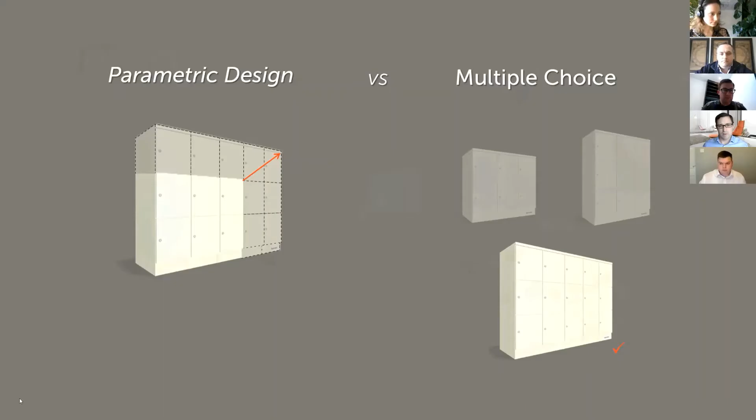While the screen is transferring to Bastian, I'll briefly cover what the demo includes. First, we'll look at how to find the customizer on the website, and then how to get started with a customized design. We'll take you through how to change the size and finish accessories of any chosen product, and then how to generate resources like a JPEG snapshot or a PDF summary, and even a complete customized CAD block to insert into your project.

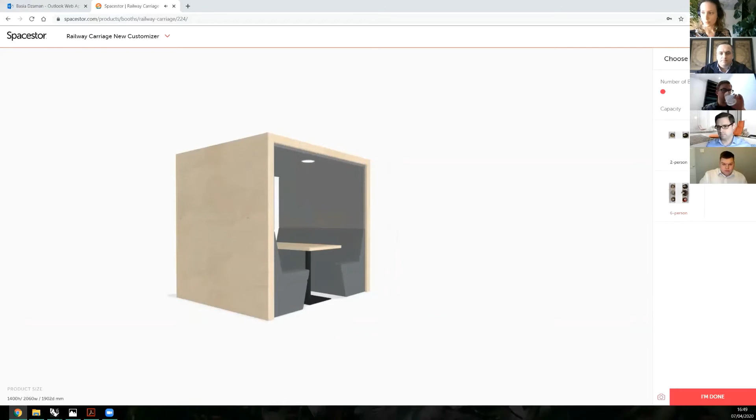So how many people can fit in the booth. Let's pick 4. You can pick how many booths in a run you'd like to have, and each booth can be adjusted individually.

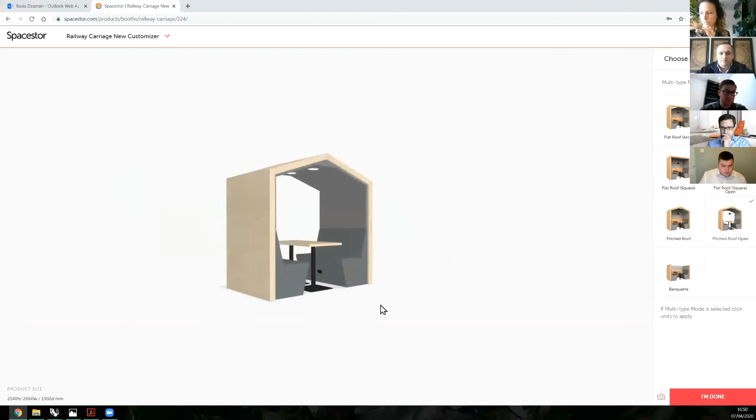Let's pick 1. Under choose configuration, you can pick the type of roof that the booth has. Let's pick a pitched roof without back. Every time you want to look around the model, simply drag in the scene or zoom in or out.

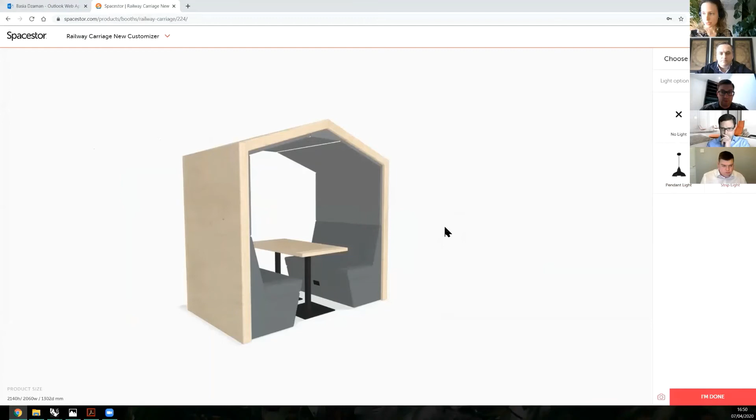Under choose accessories, the railway carriage has all of the light options, so for example a pendant light, strip light, and spotlight. Whatever I pick in the menu is automatically shown in the scene.

Then in the choose materials tab, you can pick all of the cladding materials in all the Spacestor ranges for cladding or upholstery. Here we can choose a different range of upholstery, and by picking the color, it's going to change the color of the booth.

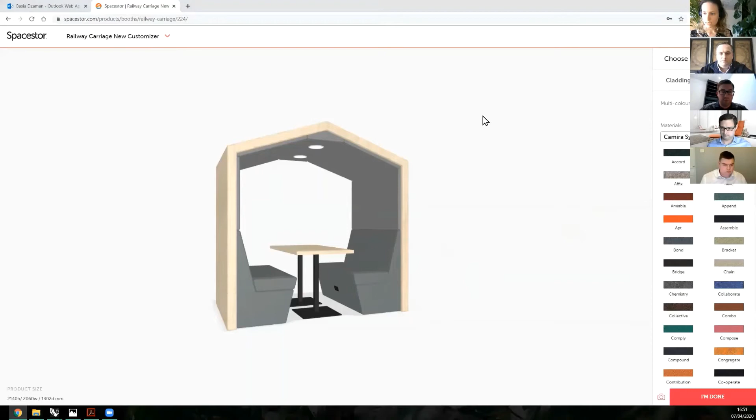The last step, when you're happy with the design, you can either take a screenshot by clicking this button with the camera here, and it's going to download the screenshot straight away. Or you can go to the I'm Done menu in order to choose what you'd like to do next.

Here we can ask for a quote. Clicking Quote Me adds the design to the quote basket. You can add multiple designs to the quote basket and request a price. Our team will surely get back to you with the price.

You can also request a package with a specification and screenshots and all the CAD that is generated specifically for the design you've just created. You can also save the design for later.

In order to do that, simply sign into the My Spacestor account. It's a free online account on our website where you can keep all of your projects. I'm just going to put my credentials in, and here you can pick all of the projects. You can also add new projects if there aren't any.

And I'm going to name this design and save it.

On the left, there is a summary of what's in the scene, so you can always proofread it and see if everything makes sense.

If you want to see all of the saved projects, you need to go to the My Spacestor account, and in this portal, go to My Projects. Here you can see all of the saved projects and arrange them into sections. You can change the names of the sections and drag and drop all of the products around. I arranged them into current projects, inspirations, and past projects.

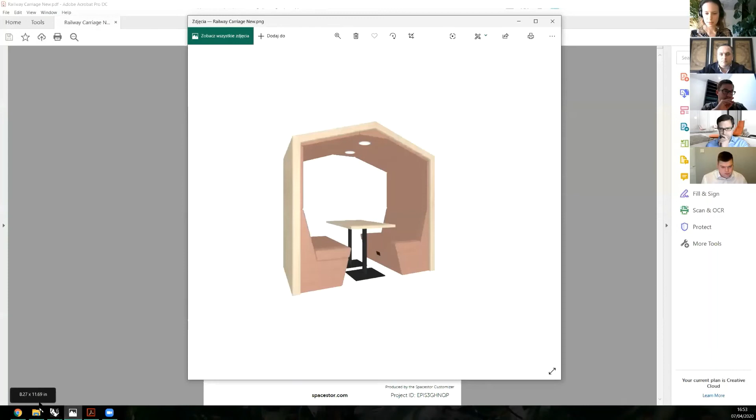Now let's go to my email and see if the design has been generated. And here under the download, we have a package that we just received from the customizer. In the package, there is a PDF with the specifications, a screenshot, and all the CAD blocks. Different designers and architects are using different programs, so the package contains all the most popular file formats. The only one we still have to generate manually is Revit, but we're currently working on automating it to be part of the package as well.

Let me show you how this looks in practice. I'll open up the Rhino file to copy the blocks. Here's the design we've just created. I'm just going to copy this, group and copy.

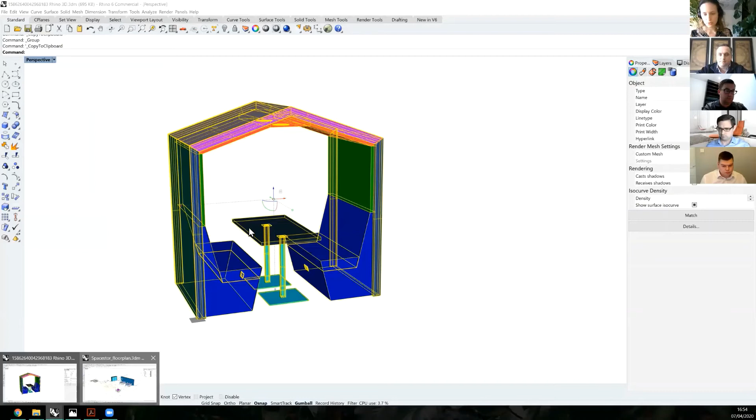And here I have a plan of our New York showroom open, and I'm going to simply paste it into the scene. Here it is. Now we have to position it correctly. I'm going to do it in the top view right now. So here it is, and I'm just going to paste it in here.

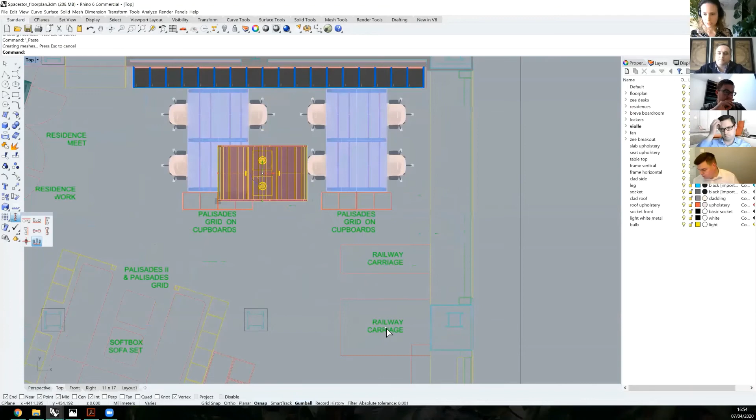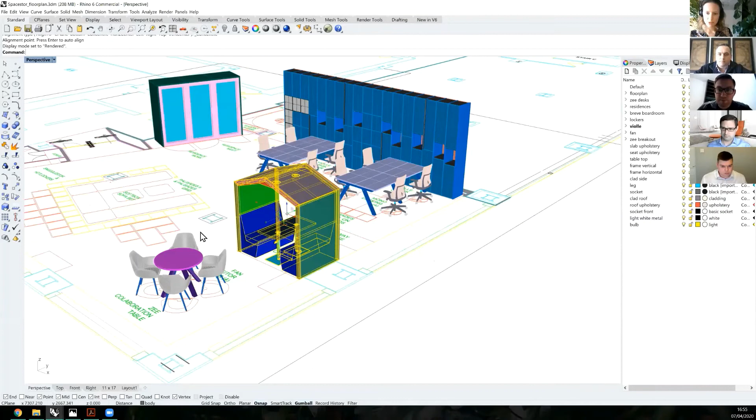So here is a space for the rail carriage. Let's see how this looks in the perspective view. Here it is, and now I can change the view to make it look nice. So all of the blocks are in the correct layers that can have a different material added.

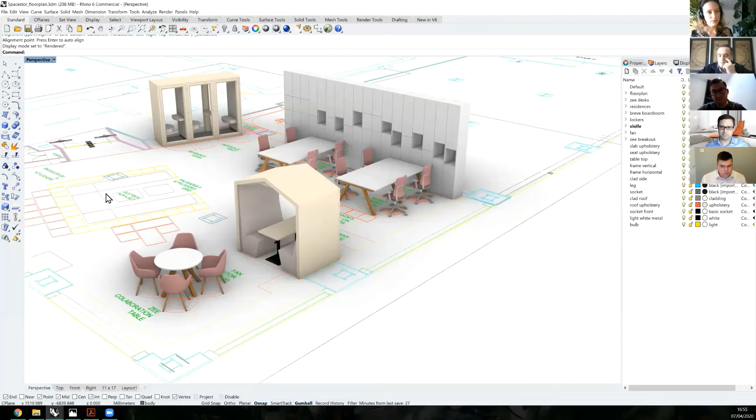And you can do the same for 3ds Max, SketchUp, AutoCAD. There are also 2D drawings for AutoCAD, you only need to put in a plan. And as I mentioned before, we have a lot of different products that can be customized.

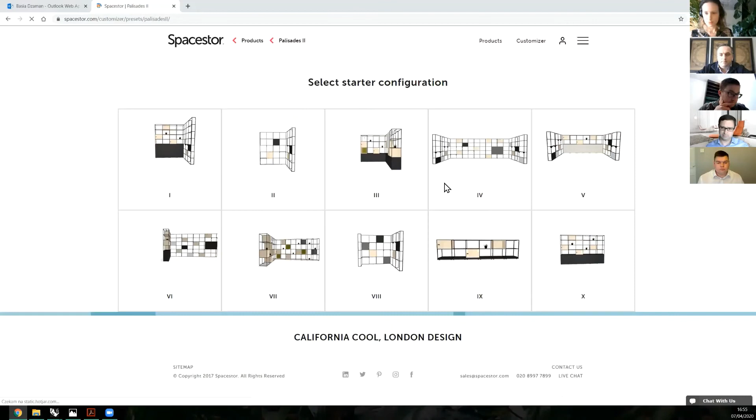Now I'm going to give you a quick example of one of the other products. Let's go to the Customizer tab, and here, let's say Palisades 2. Here are different presets for Palisades 2. Let's pick one. Every customizer is a little bit different because each product has different features that can be customized. So Palisades 2 has a different shape. Let's wait until it loads.

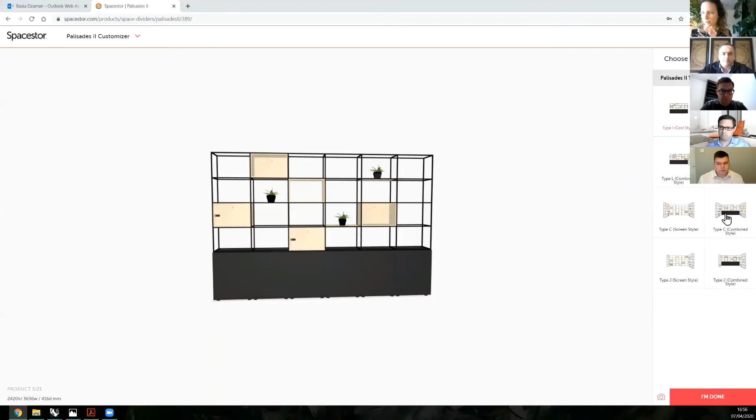Here there are different shapes that we can start with. Palisades is a zone divider, so it can have any shape we want. Let's pick the simple run. And here under the choose size tab, we can pick the size of the grid.

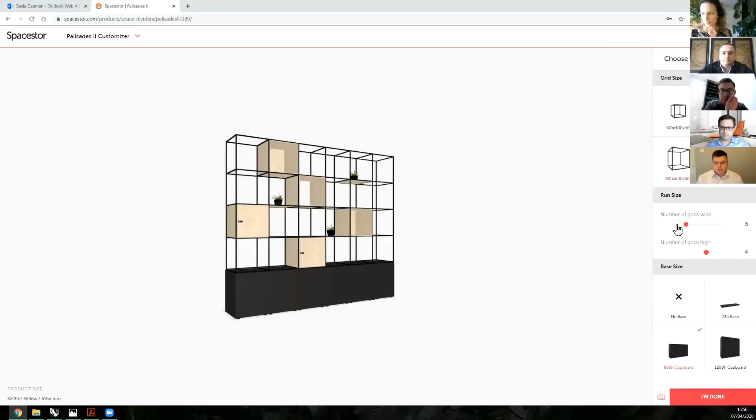And it's changing, putting all of the grids in the scene. We can change the number of grids wide and also the number of grids high. You can also adjust the size of the base.

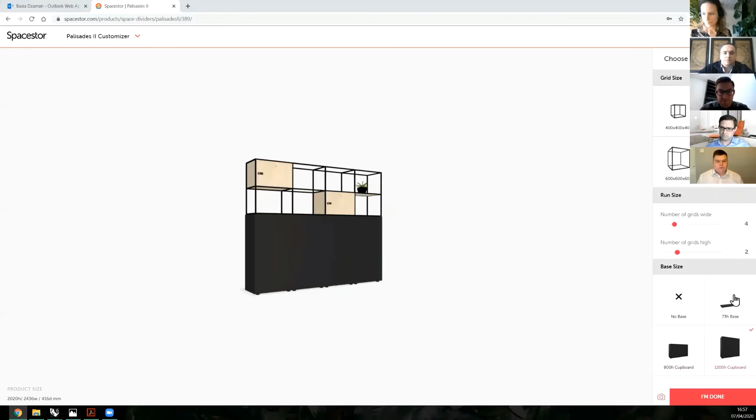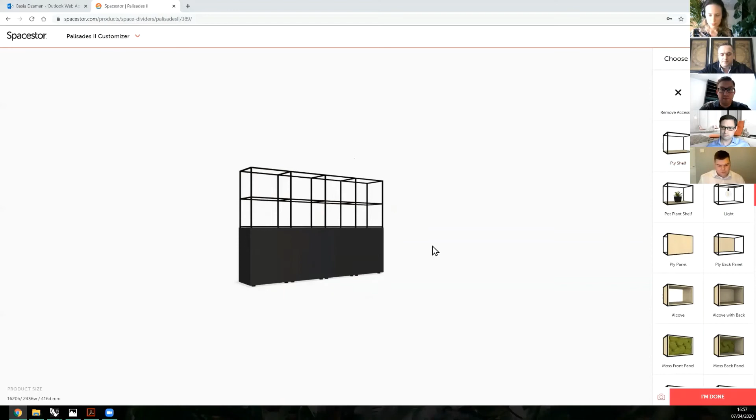Let's pick a medium cupboard option. And under accessories, accessories look a little bit different to the rail carriage accessories because we have to either remove all of them by clicking remove all accessories, or in order to add any, we have to pick the accessory we'd like to add and then pick the grid that the accessory goes into.

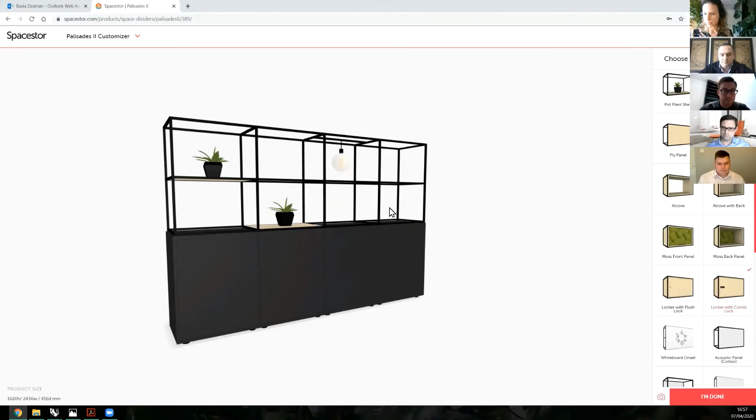And then we can put some lighting and a locker. If we pick any accessory that is not compatible with the rest of the accessories, it will simply swap the accessory for the new one. So here I swapped it for a whiteboard, and I can just go back into other accessories.

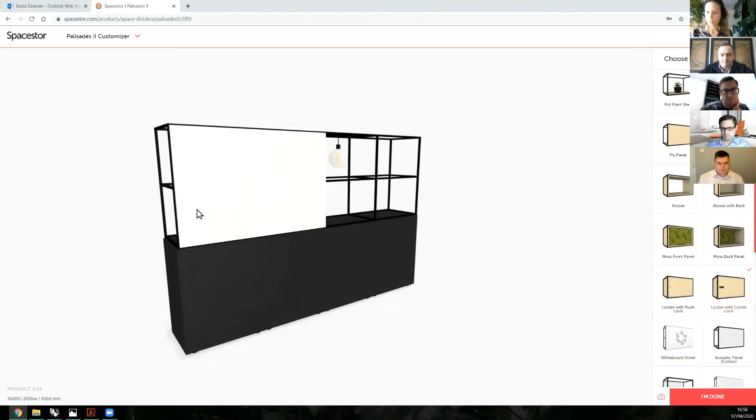So it will always make sure that the design is possible to be manufactured. When you're finished with the Palisades run, just like before, you can download, save, share your design, and this is a feature available in all the customizers.

I hope that gives you a brief overview of some of the innovative features available on our website to help you simplify the process of customizing your designs for clients. If you have any questions, please get in touch.

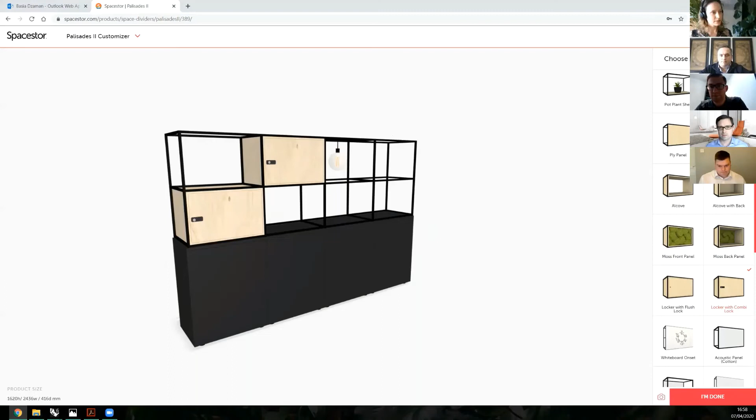Excellent, thank you Basia, very helpful demonstration. We're always developing the customizer in line with customer feedback, and we're asking for your feedback now regarding future developments and features. On the screen in a minute you'll see an example of some of the features we're considering adding to the customizer, and I'll quickly run through what those are.

First of all is a download as a Revit, as Basia mentioned. This is technically very difficult, but we're confident we've got a good chance of cracking this. We want to check with our customers, is this something that would be appreciated and used?

The second one is the ability to view favorites and projects in the customizer window. Basia demonstrated how you can see these in the My Spacestor section of the website, but if you could see previously done designs right in the customizer window and drag those in and view them, would that be useful to you?

Third is pricing. There's a possibility we can add real-time pricing as a feature to the customizer, so as you're designing you can see how it's affecting the price. This comes with caveats - you want to make sure some of your customers don't see the prices you have, but that could be behind a login, or we could do retail or list price.

The fourth one is about presets. You would have seen as we launched the customizer, you had 6 or 7 presets there. We could increase that number and triple it, so you have dozens more available. Is that something you would use?